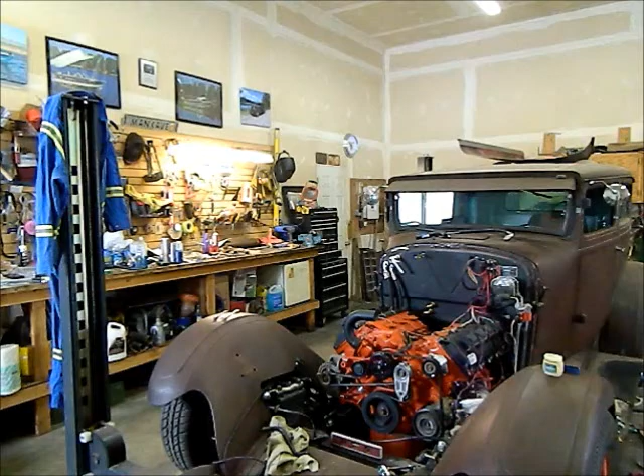Made it through another crazy week of weather. We went from almost double digits above in Celsius to minus 13, minus 14. We had a snowstorm. Just crazy winter. Looking forward to spring coming and getting out to enjoy some nice weather for a change. It'll probably be hotter than a firecracker this year.

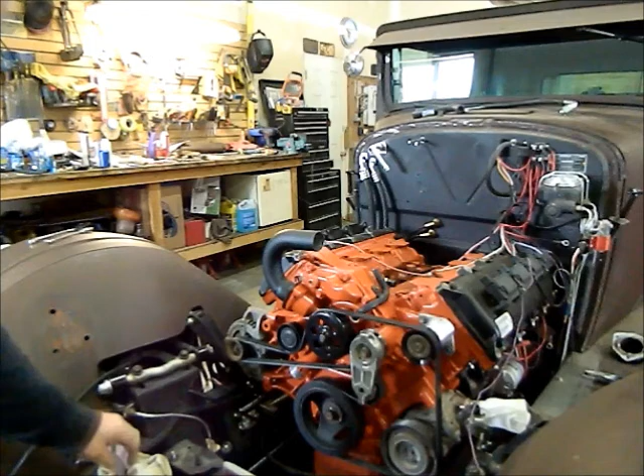So anyhow, I'll show you what I'm working on, what I've got done, and what I've got left to do here. So still waiting for parts as usual. I've been working on a bunch of little stuff here while I'm waiting. I'm not sure if I mentioned before, but these are my heater tubes. They used to run underneath the intake manifold, but I had to modify them for the truck intake.

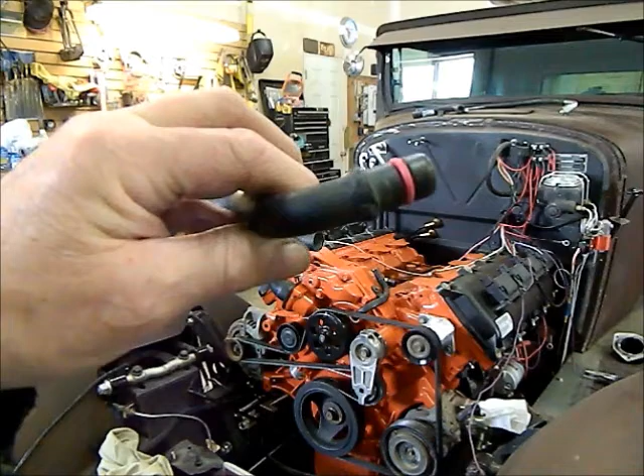And these little pink devils here are the factory Chrysler O-rings. I don't know if it's because they're pink or not, but they're worth about $15.30 a piece Canadian. And according to Sky over there on Reignited, if you don't replace them, they're going to leak on you. So he said to use trans goo or something. That's what he always uses. It's an assembly lube for assembling transmissions. So I Googled it because there's no place around here I can buy it, and it's just glorified Vaseline.

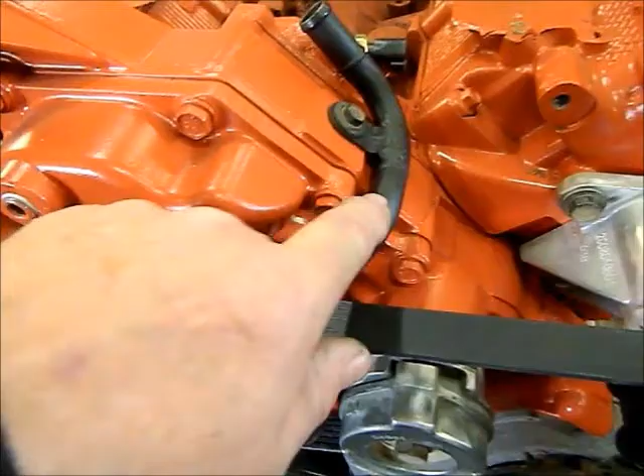So I've got the one done. See if I can get you positioned here. This one right here goes in, the O-ring's down in there, it comes up. It used to go straight back behind the intake. I cut it, welded it, brought it up here. And the way I checked these for leaks was with methyl hydrate. If it's going to leak, methyl hydrate will find its way out of it. So I filled the tubes, let them sit, and nothing came out of there.

So the other tube, I'll see if I can get you positioned here. It goes in a hole right here, I believe. Yep, right down there. And then it gets bolted here, and it'll run along the valve cover here. So I'll see if I can get you positioned so you can see what's going on.

As Arco would say, excuse the bad camera work, but I'm a garage hack, not a cameraman. I guess that's a good way to put it. So see if I can get you up here high enough. Oop, drop you on your face. How about a little bit of telephoto? See if that works.

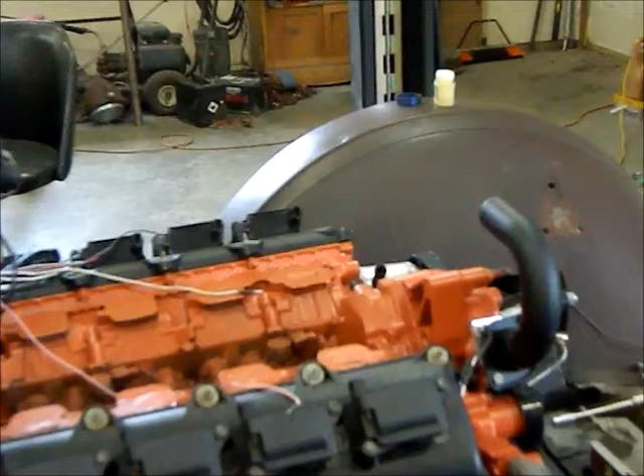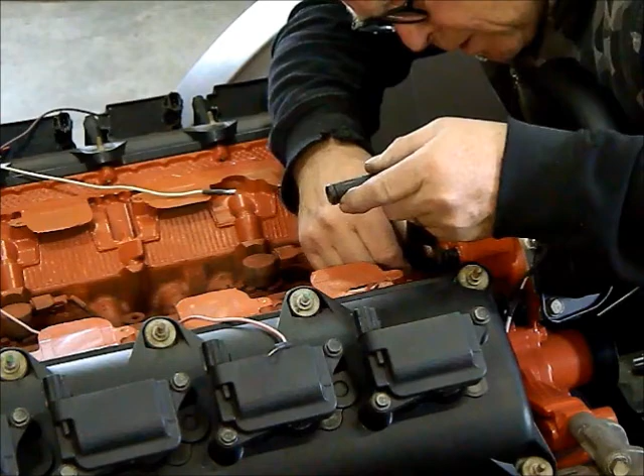Okay, so what I'm going to do is put a little bit of Vaseline on this O-ring that's made out of purple gold or pink gold. We'll get this stuck in there. Make sure that hole's nice and clean. I knew I had a bolt for this thing here somewhere, right there. Run that in. This will allow me to run the heater hoses conventionally up to the firewall where I have the bulkhead fittings. I got lots of room for the intake. It's already been on there. There we go. Heater tubes are installed.

The other things I've been working on, I'll just pop you out of the tripod here for a sec. If I can do this without screwing up too bad. So I've been playing a little bit with the wiring while I'm waiting for parts and pieces. I've got these two wires here that come out of the firewall.

Just let me take it off zoom. A bit clearer picture. Okay, let's focus. The heck's going on? I'm losing you. There we go. Focus is coming back now. Here we go. It's going the wrong way.

So anyhow, we got those two wires that come out, come down. I had to lengthen them a bit. Then I had to do this. I believe it's a 3/8 NPT fitting out of the block there, a 90, and then my oil pressure sender.

The other wires come up here, and what I've done to allow the use of the old school gauges with the Hemi is, in this machined area where the thermostat goes in, there is a nice flat area right here that you can drill and tap for 1/8 NPT for your sending unit. It worked really well. It's about 1/2 inch thick, depth-wise, into the area right above the thermostat, so it works really well. So I've got that all wired up.

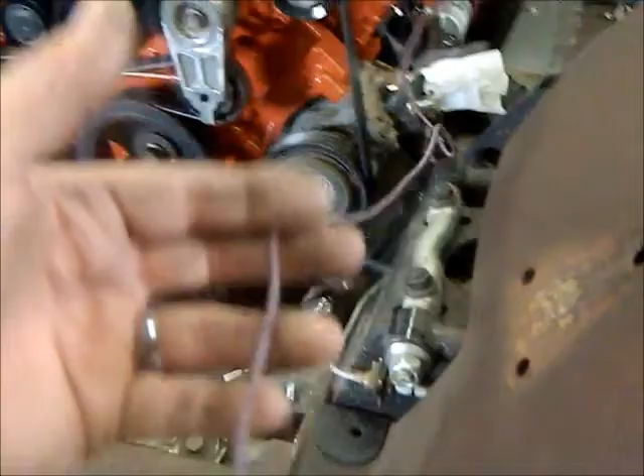What else do I have here? I've got a bunch of the wires sorted out on the other side. Bunch of stuff I don't need. This was my tach signal. This will go away. It's going to be run underneath with the Dakota Digital STA 100 tach driver and OBD2, which will give me my check engine light. So out of all of the wires that come through, this group here is all extra stuff in the engine harness that was never used on the Hemi, and it'll remain that way. This one here, I'm not sure what it is. I have to check that one out.

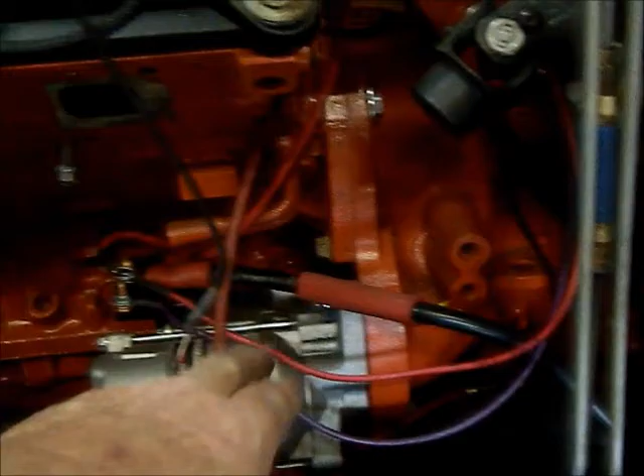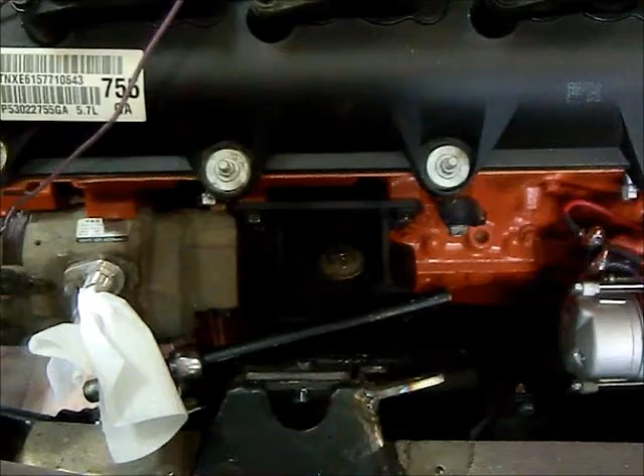This is my ignition wire from the ignition switch. The only thing I needed down here, I've got my battery cable. My starter wire is all hooked up here. It's all ready to go. If I was to turn on my battery switch, I could turn this over right now. So still waiting for the compressor to come in. I can't put the steering in until the compressor's installed, so kind of waiting for that.

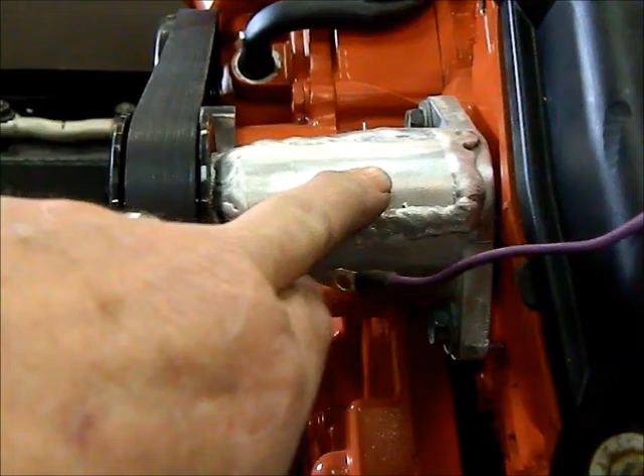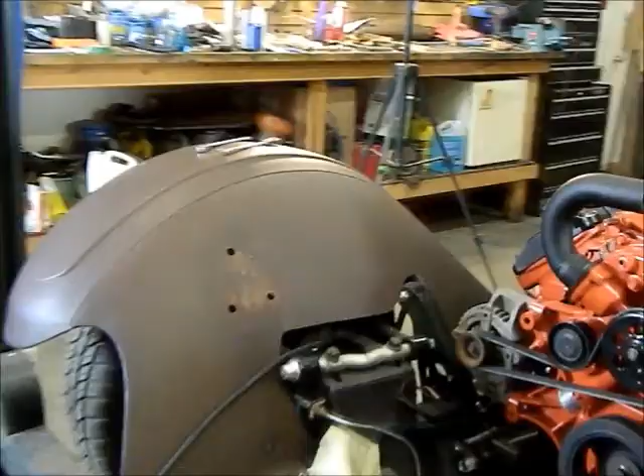And then the other one I did is this power steering delete. When I welded it together, I had mentioned that it's a really porous casting. So what I did was I welded on a strip of, I think it's 140. It's about 1/8 or a little better than an 1/8, as a backbone on it to strengthen it up. I didn't want any issues with that. And then we'll go underneath and I'll show you what's happened under there. I got a bunch more done. Just put you on the tripod here. Lift this thing up.

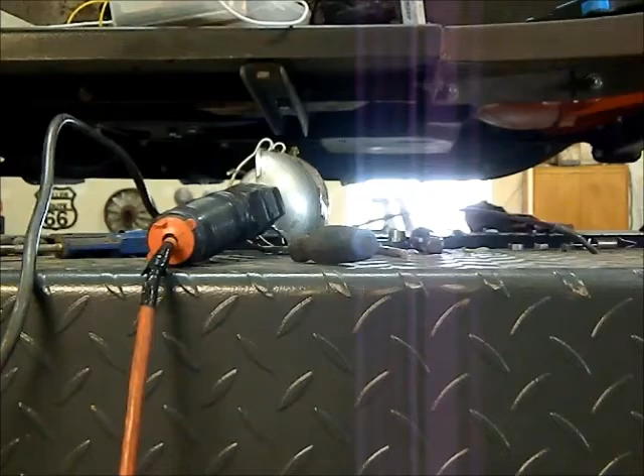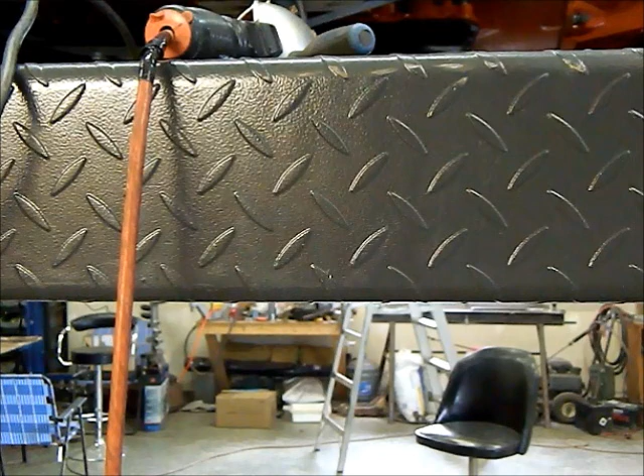Those gun locks are pretty loud. Get a light turned on, and take you underneath here. Okay, so on the underside, I have my shifter hooked up.

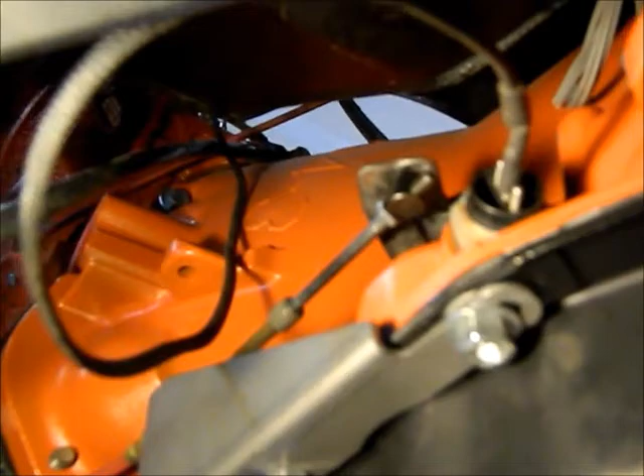It's all adjusted. I had to modify the arm. Had to bend it up a little bit, put a kind of a Z bend in it, drill a new hole, and calculate the movement it needed for all the gears. Got my neutral safety switch wire installed on this side. A little bit more complicated.

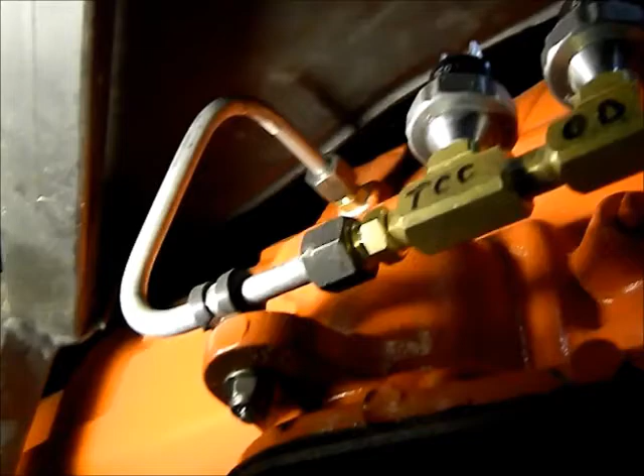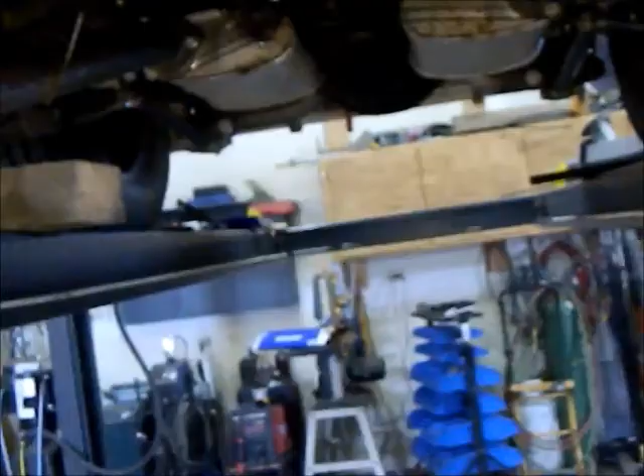So that pressure port up top is one of the main transmission pressures. What I've done is I took a piece of 5/16 steel line, flared it. I have a T and a 90, and I have two pressure switches there. One is 52 psi and one is 50 psi, and it's a kit that you can get from PATC Transmissions. It also has a vacuum switch that goes up top.

What it does is it shifts the transmission into overdrive when the pressure reaches 50 psi, and it'll lock up the torque converter at 52 psi. And then the vacuum switch up top, when you put your foot into it, shuts both of them off and drops it out of overdrive, so you don't have to install toggle switches on the dash. So it's pretty simple to wire up.

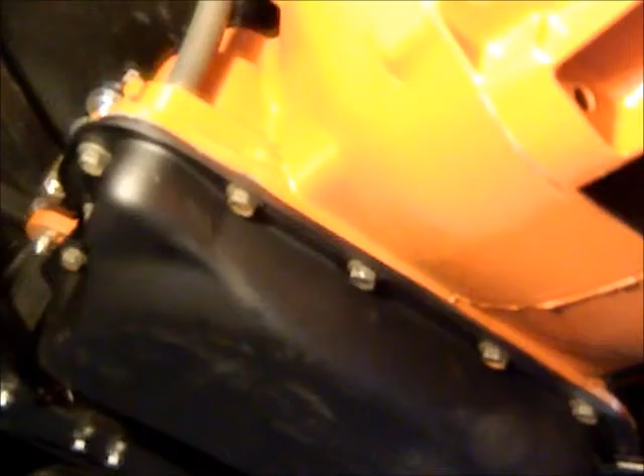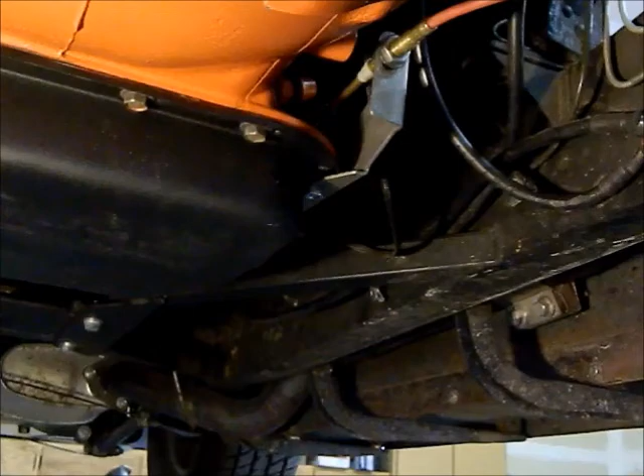I got to run a wire from each of them over to the switch harness that goes into the transmission, and that's done. So the other thing I've done is, hopefully I can show you this. If you look up here, there's a black tin plate, another black tin plate there, and one behind the starter. Those I had to fabricate to keep the dust and dirt out of the ring gear and stuff. It was a bit of a pain in the butt making them.

There used to be a spacer plate on the Hemi that went between the two, which I couldn't use anymore because the Hemi had the starter on the passenger side, and this 46RH has the starter on the driver's side.

Motor mounts are all in and torqued with Loctite. I got the cross member in; it's all ready to go. So I'm closing in on a bunch of the small stuff on this, getting that all done. All the transmission mounts and everything are in and tight. I'm ready to install a drive shaft.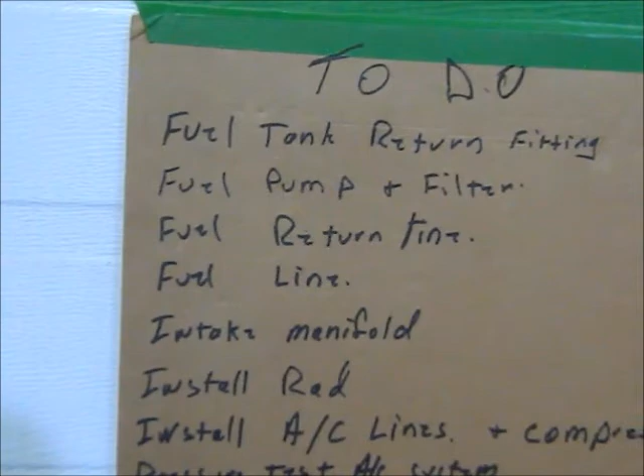And we're far enough along on this that I was able to do a list of final assembly before I can drive it. And I think we're at about 15 items on the list. So far I got nothing on the to buy list. I'm sure that's going to grow. You know how that goes. It never ends. So I got a fuel tank return line fitting I have to put in, so I have to pull the fuel tank.

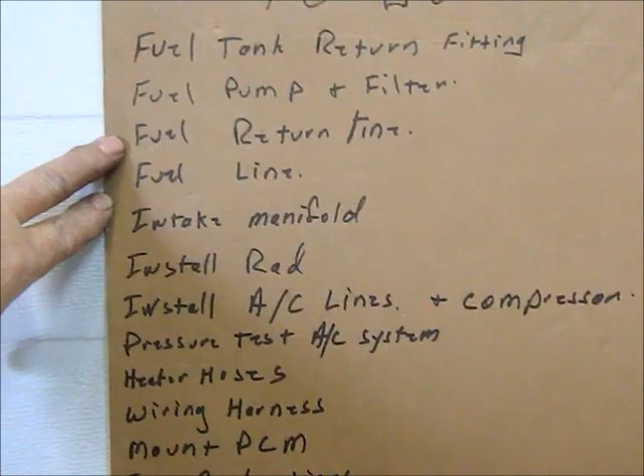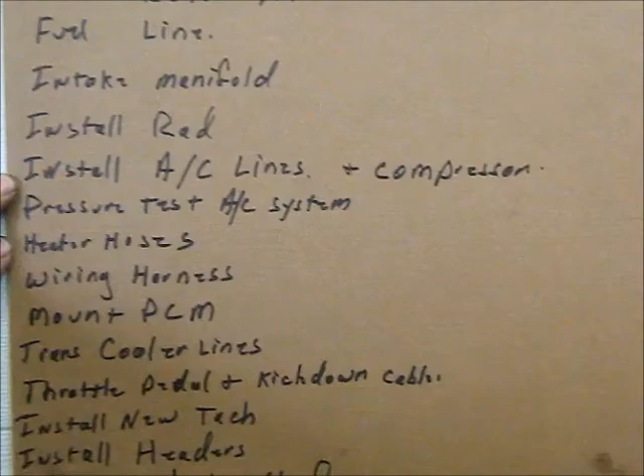I have to install a fuel pump and filter, fuel return line, the fuel line, intake manifold has to go on, install the rad, install AC lines and compressor. All the lines are made. It's just a matter of putting them all together, getting everything set up. Pressure test the AC system. I've got a bottle of nitrogen. Going to use my oxygen regulator, and I'm going to pressurize the system to 150 psi.

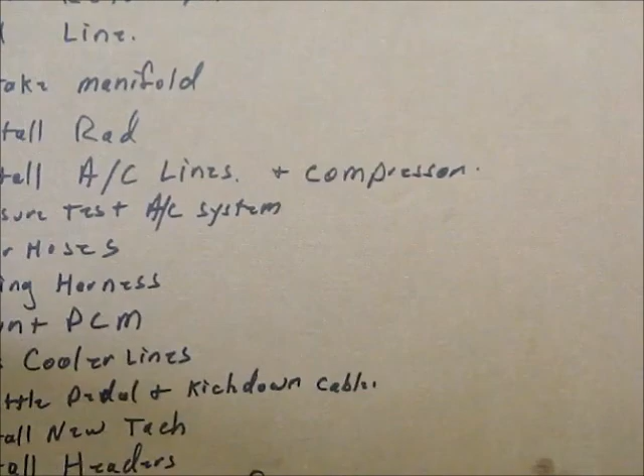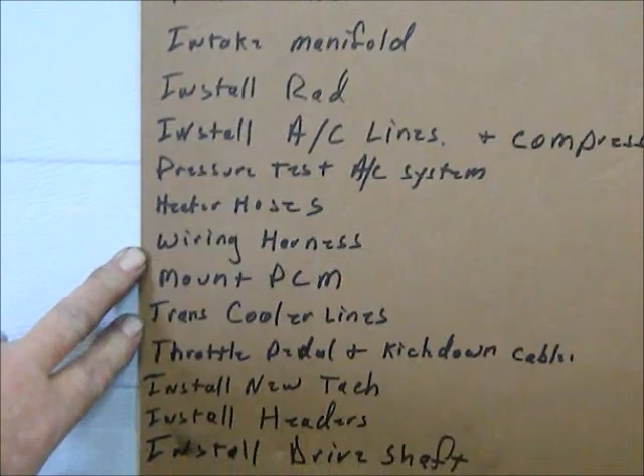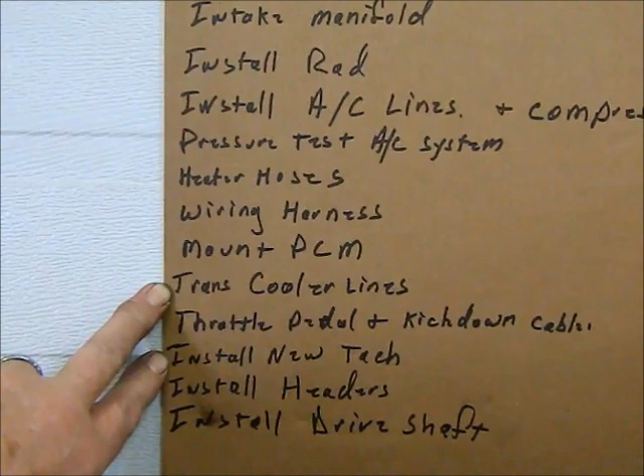Check for leaks, and then I also bought a vacuum pump as well as the gauges and everything for charging the system. Heater hoses have to go on. I'm going to redo the Hemi wiring harness as far as wrapping it, sort the wires out, clean it all up, mount the PCM, transmission cooler lines. I bought some 3/8 steel lines for that. Throttle pedal and kick down.

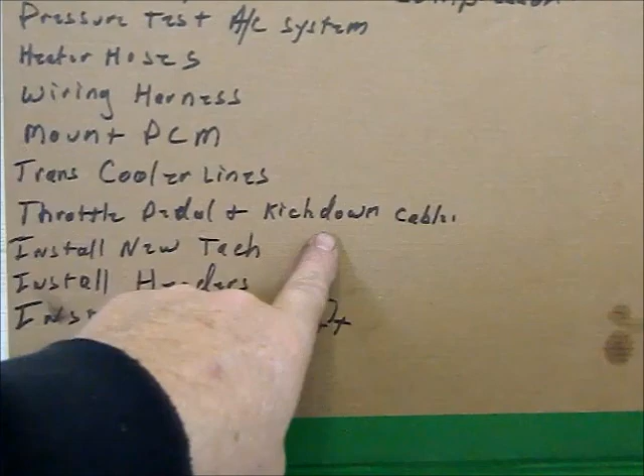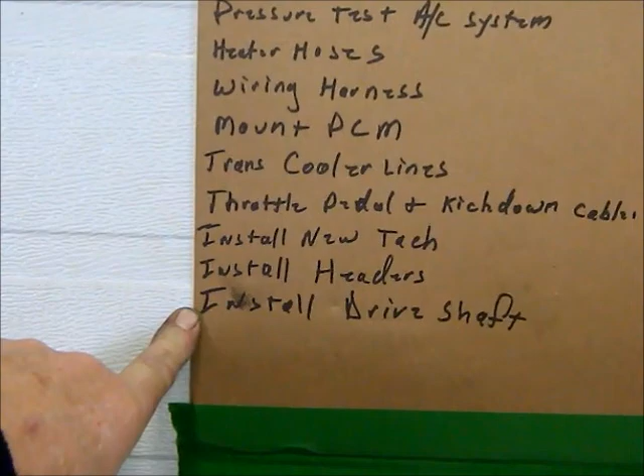The pedal's ready to go in. I have to mount the kick down cable underneath the car, get it so it's adjusted. I have to put in a new tach. The one I have is faulty. Install the headers. The headers can't go on until the steering's on, and the steering can't go on until the compressor's on. So everything's tied together, and install the drive shaft. And then she should be pretty much ready for its first burnout, guys. So that's where we're at.

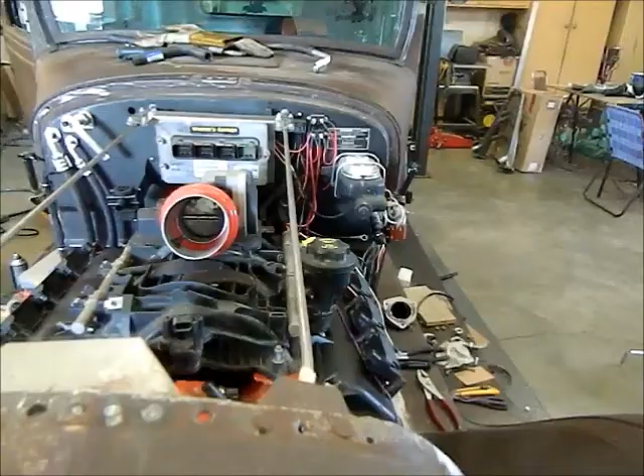Guys, had to come back real quick. I couldn't leave this Sunday without checking something off of my list. To show you, I got one thing off, mount the PCM. That's done. Did that in conjunction with redoing my shock rods here. So the PCM is mounted just in front of the firewall off of the rods.

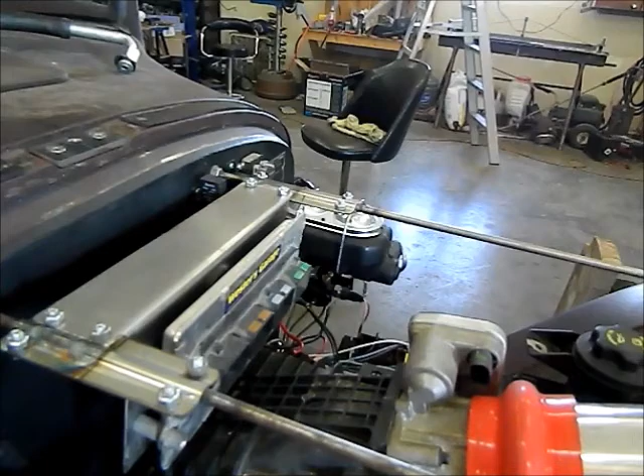I'll put a waterproof cover over top of it just to shed the water down. I'm going to bend it back just a little bit more and add a gusset from this bolt down to stop it from vibrating there. So that should take care of that. It's going to keep all the wiring underneath the hood, and there should be enough airflow with no sides on my hood to let the air out.